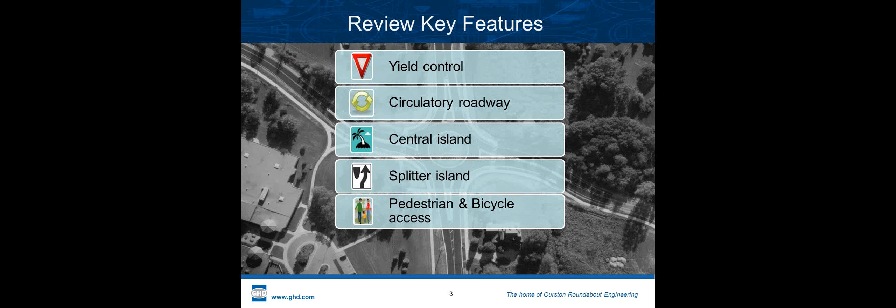And I wanted to start out, for those of you who perhaps don't have much roundabout experience but may have driven one, to kind of wonder what some of the features are. We'll just do a very quick review of these geometric design elements and some of the operating characteristics. So bear with me if you've seen this many times.

The principle of roundabouts is yield control. In some countries, I wouldn't take this for granted. We happen to have a driving culture where people adhere to regulatory traffic controls. But if you go to Beijing, it's pretty much first in - in other developing countries, they don't adhere to the same regulatory controls. So a device or type of control like roundabouts only has a future if there's cooperation among drivers. If there's a healthy amount of enforcement, education, and cooperation, then devices like this can really flourish and provide benefits to society. Examples are countries like England and the UK, where the cooperation among drivers is very strong, and the education and capability of drivers is very high. Roundabouts perform exceedingly well there - they have one of the lowest crash records of any developed country.

They lower their fatals, they lower their injury crashes, and they also have some of the most efficient infrastructure for the amount of pavement on the ground. And it's not by coincidence, but a deliberate thing that if you integrate driving education with good design, you'll achieve all the benefits of roundabouts. I'll say a bit more about that.

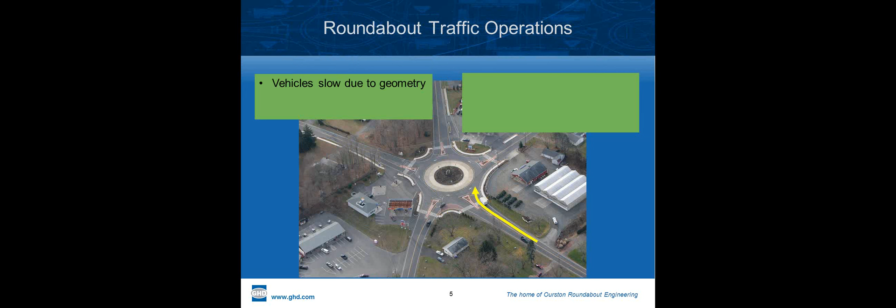Well, through deflected entry paths. The geometry helps to slow the vehicles so that when they arrive at the give-way point, as the British refer to it, or the yield line as we commonly call it, the speeds of entering and circulating traffic are relatively equal, within 5 to 10 miles per hour. That helps to motivate the entering driver to yield to circulating traffic.

Very important for roundabouts, and that in itself is a strong suggestion that geometry plays a very big role in how roundabouts operate—that yielding before entering. The counterclockwise flow, we all understand in the UK it's clockwise flow for left-hand drive, but over here we interchange roundabout layouts and just put the deflection on the other side from what the British apply.

So they tend to have less delay than traffic signals. At least the studies and early results from the last 10 years of feedback from roundabouts in operation show us that they're more efficient and reduce stops, delays, and improve air quality. So there's our counterclockwise flow.

This roundabout—I'll try and give you a commentary on these—is near Hartford, Connecticut. The DOT had involvement in it. It was a county road project, shoehorned into some very tight development and access constraints. I'm sure you've seen sites like this: a 5-leg intersection, very difficult to signalize. It met signal warrants, and they had to take some property, but access wasn't severely impacted.

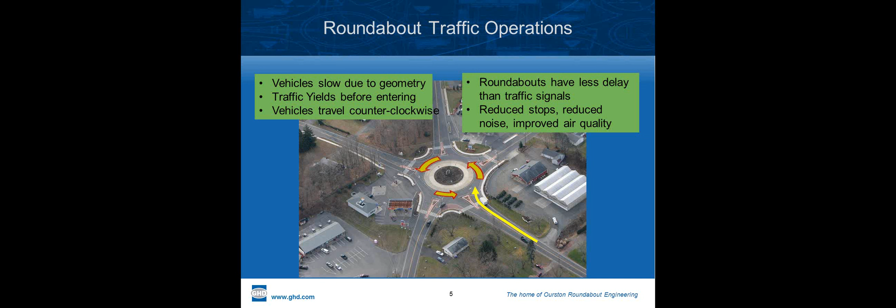So I love looking at roundabout photos. We have a lot of that in this module, and for the next 11 hours or so of these sessions, we're going to do a lot of visual.

So other roundabout features: the circulatory roadway, whether it's single lane or multi-lane, whether it's striped or unstriped, and we can talk a bit about the striping issues and crash frequencies associated with it.

The splitter islands that divide opposing streams of traffic, and assist with the deflection characteristics of the geometry.

The exit paths and the natural exit paths of roundabouts—I rather like flatter and not so curvilinear exits, and I think they're justified because if it's a capacity device, you want to flush the traffic out of the circle. You don't want to impede it as it exits. That, of course, depends on the quality of entry design and how slow you can get them to enter, whether or not the exit speeds are too high for pedestrians or just adequate. So there's a lot of kind of not too hot, not too cold, just right in terms of design of roundabouts.

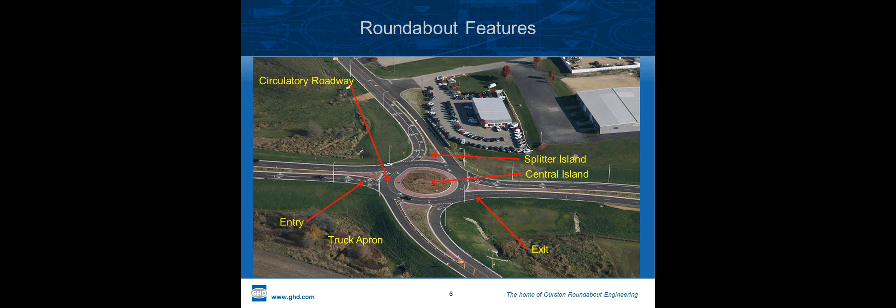Central Island—these days they're being mounded, although there's no safety research correlation between crash incidents and the height of the Central Island. It's intuitive for designers to want to block sight across the circle.

Then the truck apron, which is probably about a 12-year-old invention. When we began to stripe roundabouts, we had to add truck aprons because lane discipline demanded that we provide additional over-tracking area for the trucks. Otherwise we had sideswipe issues. So back around 2002, the first truck aprons began to appear on multi-lane roundabouts. That deflection characteristic is key to the operating condition.

From the straight line path, it's a visual deflection, it's a physical deflection, so the driver slows as they enter. But it doesn't demand or take so much efficiency away from the intersection operation that it's poor in comparison to other types of control.

Roundabouts are generally preferred at rural locations where signals can result in high-speed angle crashes, so it's a safety countermeasure. Anyone who does safety audits, roundabouts are now in your toolbox. Any location with a high crash history where you have signal warrants, or in some cases you don't have signal warrants, you may have a safety warrant, or you have some high side street delay that doesn't meet signal warrants, and a roundabout's the ideal solution.

Obviously at congested intersections, and we have enough proof where roundabouts are reducing congestion very well, where there's a high proportion of left turns, where you would otherwise put in a double left turn, or you have protected phasing demands at a traffic signal that can't be served because of other demands of timing at the intersection. Roundabouts are suitable in those conditions.

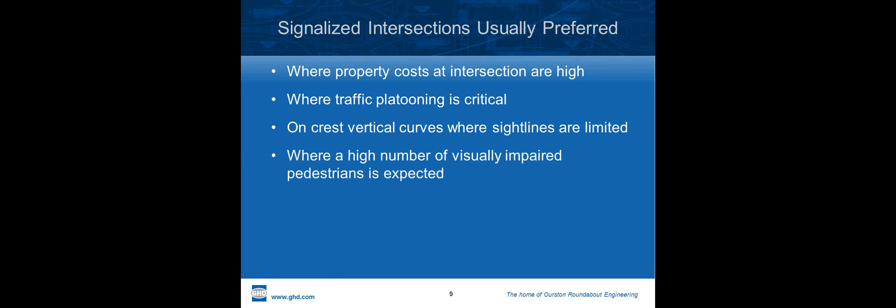Visually impaired pedestrians are expected. The U.S. Access Board deems a single-lane roundabout to be an accessible intersection with the proper crosswalk treatments. That's a debatable issue, and I'll show you an example near the end of our slide set where we went to a municipality and a roundabout was proposed, but we had some visually impaired and wheelchair constituents in that community that opposed the roundabout, and the signal was preserved or rebuilt and preserved. So some interesting comments can be made about the U.S. Access Board and those issues.

Where side street traffic is low and safety is not a problem and semi-actuated signals can be used, that's often a better solution than a roundabout. So there aren't many situations where putting a signal in place would improve safety as compared to a roundabout. But if it isn't a safety problem today, then sometimes actuated control is the better solution.

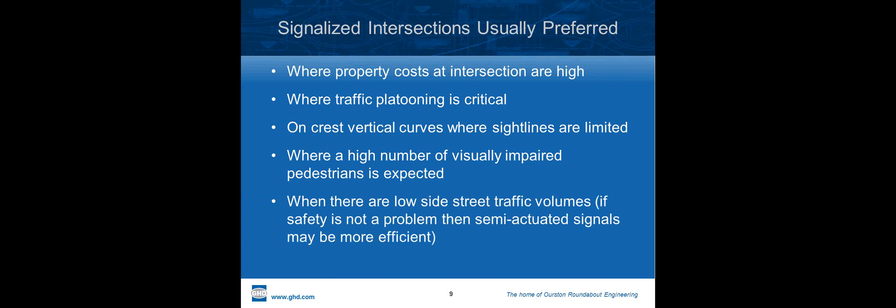We see this instance come up with development driveways, access, Walmart, actuated, semi-actuated control that only trips during peak hours or heavy shopping periods and is otherwise in a green for the main street. That's sometimes a more efficient way, particularly if it's in progression on a signalized corridor. That may be the best solution.

So some of the benefit considerations is safety. That's the one that sells it. If you're trying to convince the public that a roundabout is a good solution for a location, and they are coming back and saying, we don't like roundabouts, they're confusing, they're hard to drive, it's good to empathize with them and agree with them. But the real change occurs when people equate the change that they require as drivers with a safety benefit. When you can tell them that we understand this is not going to be easy to learn how to drive, but it could save your life.

People are willing to change if they equate it with a benefit to them. So it's important to continue to tout the benefits of roundabouts in safety.

Operationally, it's a peak hour, everyday situation—reduction of delay, air quality improvements, and so on. The benefits from roundabouts, both aesthetic and in fuel consumption, are becoming evident, but we're not so strong in the research on that side of things. We're pretty good on safety and operational benefit research as a design community, but environmental benefits could use more studies. Folks at the university, this is great stuff for graduate thesis and projects—just get into the environmental benefits of roundabouts.

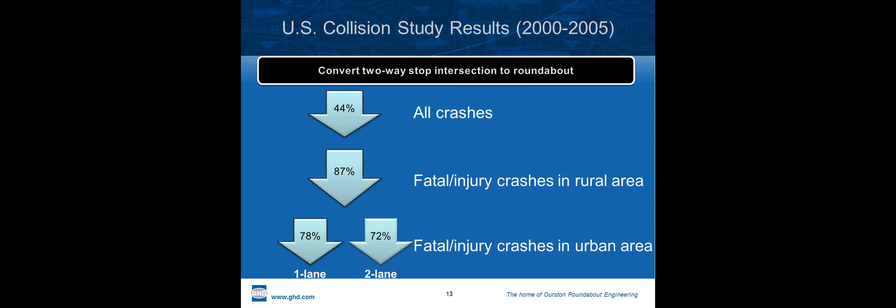So what do the statistics tell us? The conversion of two-way stops shows all crashes down in the 40s, close to 90% for fatal and injury crashes. For two-lane roundabouts, I'd say it's in the range of 50 to 70% for injury and fatal crash reduction. On the property damage side, some of the two-laners are actually generating an increase in crashes, and I welcome anyone to ask me about that.

I was part of the University of Wisconsin investigation on some of the crash reduction and operations of roundabouts.

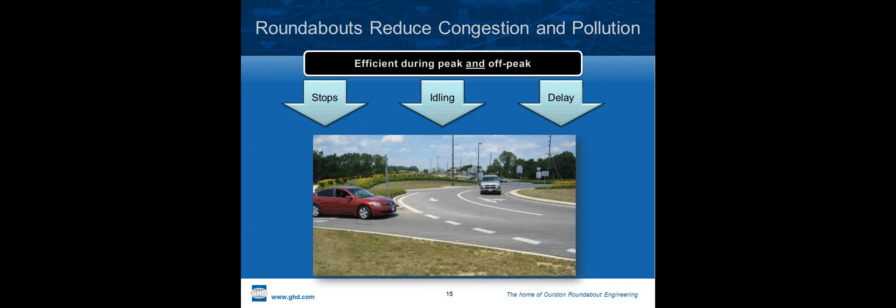We'll try and attend to that in the next couple of weeks of sessions. So the congestion relief—stops, delays, and idling—is self-evident. You can come up to a roundabout 24/7, and instead of an actuated signal, you get to go when there's a gap, and sometimes you don't even have to stop or yield at the entry. You just reduce speed and pass through comfortably.

So on to site selection. I want to show you a number of locations where I think roundabouts were an excellent solution, again to spark your imagination as to the kind of things that are possible and the decisions agencies have made to use roundabouts, either as a congestion countermeasure or to improve safety or reduce crashes.

This one over in Albuquerque at Central Avenue and 8th—you can see, if you follow my cursor, this sort of free flow, likely higher capacity, but a somewhat complex intersection condition with this left turn crossing at unusual angles in unusual places.

I don't know what the safety record is for this intersection, but I dare say it was probably efficient but not so safe. These days in urban areas, we really like to bring pedestrians into the picture with bicyclists. A design like this pushed the pendulum heavily in favor of pedestrian and bicycle movements with low speed.

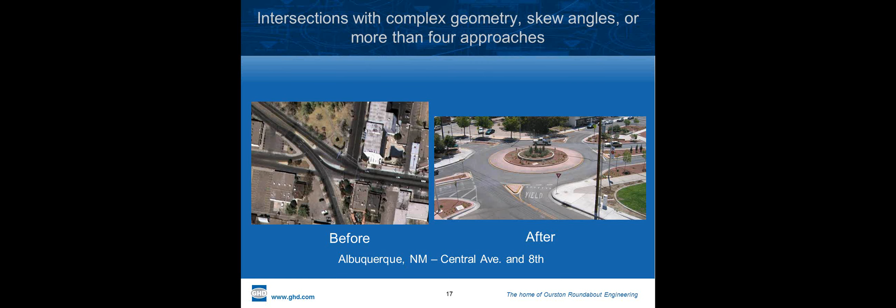It's obviously low volume capacity, and yet without signals, it's operating very efficiently in off-peak periods. So the shift is taking place, and communities are finding solutions like this very attractive to install roundabouts.

There's no longer signal heads in places like this, so the driver doesn't have anything more than the visual clues, and that puts a high demand on the design.

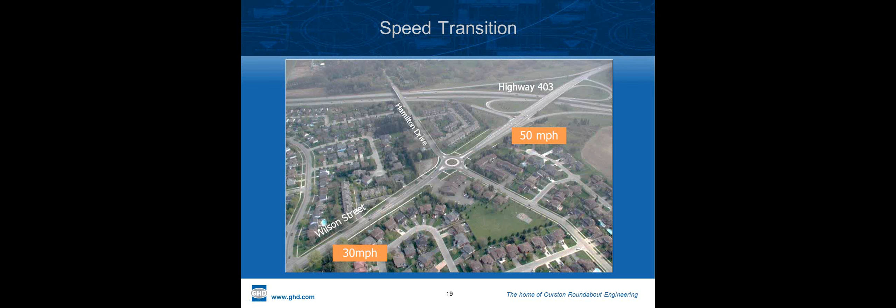There's a speed break from an interchange area down into a village area where posted speeds are reduced. This was an intersection that was otherwise warranted for signals, and within weeks of starting construction of the signals, they abandoned that option and went with the roundabout, around 2002, and it carries upwards of about 18,000 vehicles per day. So it's a high-capacity single-lane roundabout that's providing excellent speed control.

Down in Clearwater, Florida, there's a beachfront community with a lot of commercial and hotel uses, and this is a separation of land use between a more residential area and the built-up commercial areas. The residents are very pleased with the fact that it kind of creates an impediment for traffic to speed through and into their neighborhood.

I really like these because they show the creativity that designers are bringing in transit. A transit pull-out or lay-by is on the outside of the roundabout, and the use of contrasting pavements with overrunnable areas leaves the travel way intact and provides a nice pull-out for the bus, in some institutional cases or on a university campus property. So keep those in mind.

One of the most celebrated corridors for roundabouts was the conversion of Avon Road, where I-70 passes through, with a pair of teardrop roundabouts at the top, and then coming down to Route 6, two roundabouts in the center of town that replaced closely spaced signalized intersections.

Since these were done in 1997, there's been maybe $500 million of redevelopment and new development in these areas down to the creek area. Beaver Creek is just behind here. Former President Gerald Ford had a winter or summer residence up in that area. So these are very attractive tourist communities.

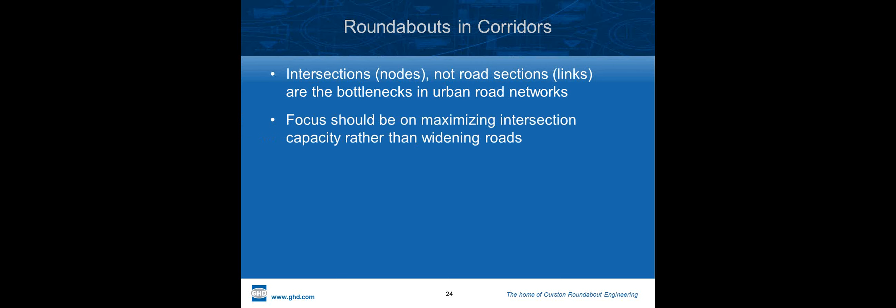Other roundabout corridors done since then recognize that it's the intersections, the nodes, not the links, where the bottlenecks occur. We all know as traffic analysts that we're not trying to solve link congestion as much as intersection congestion. So the focus should be on the intersection rather than widening roads. Leif Ourston termed the phrase 'wide nodes, narrow roads.'

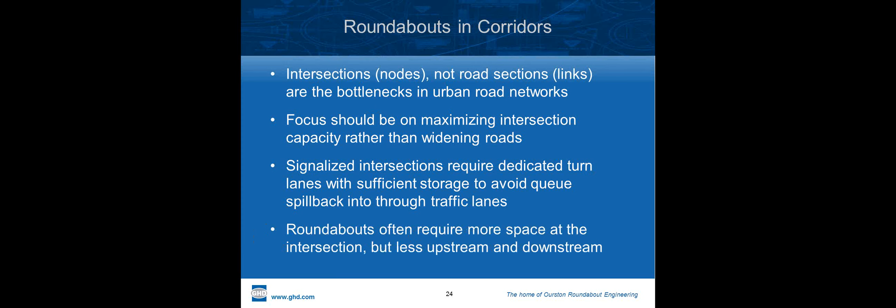The cost savings achievable with that wide nodes, narrow roads concept really make it possible for communities to advance roadway improvements without the added mid-block widening costs. So there's more space; the footprint at the intersection is always slightly higher.

Another good example of an arterial corridor was in Golden, Colorado, where four traffic signals were replaced with roundabouts as sort of the bookends of the development area, with a 2x2 configuration, two lanes in and out on these, and then single lane by two lane configurations in the mid-block, organizing and collecting up access.

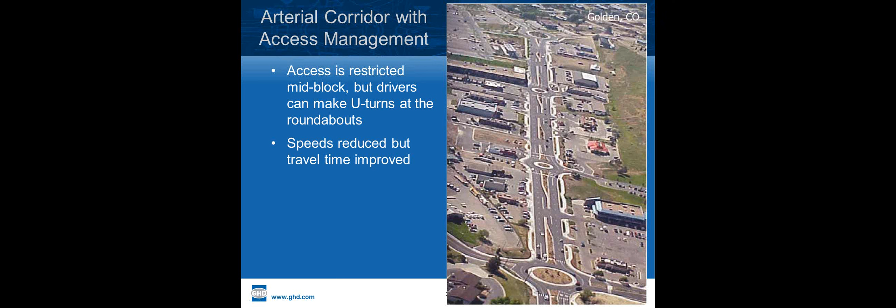The results were instant reduction in crashes, improvement in efficiencies, and increase in tax base. So papers have been published on this corridor on the commercial benefits of roundabouts.

Unusual geometry, 6 legs: St. George, Utah, milepost 4. If you drive west of Las Vegas into Utah, just 4 or 5 miles in you encounter this interchange. It has 6 legs, built around a giant Walmart. A bypass lane was added about 2 years ago for Walmart patrons, handling about 500 right turns an hour in the peak period. This little teardrop was opened up to full movements and enlarged because there's a Flying J truck stop here. These were built around 2002, then rehabilitated and upgraded for capacity in 2009.

Interior to some major developments, like Sparks, Nevada, you have this 5-leg roundabout with anchors of large retail commercial. There's actually going to be a casino and a theater added onto this development. We were asked to review this roundabout and see if additional improvements were needed. It has the capacity for 3-lane entries in its footprint, and we recommended they not expand it until traffic impact indicates it's necessary. Rather than take the development permit and expand the roundabout, because of concern for pedestrian safety, we wanted to find the balance between mobility and vulnerable road users. Very important not to overkill the capacity at the cost of pedestrian and bicycle safety. I was brought in to mediate the discussion between the developer and the city, and my recommendation was don't expand this until you have the traffic impact that suggests you need it. They put monies aside in case it's necessary.

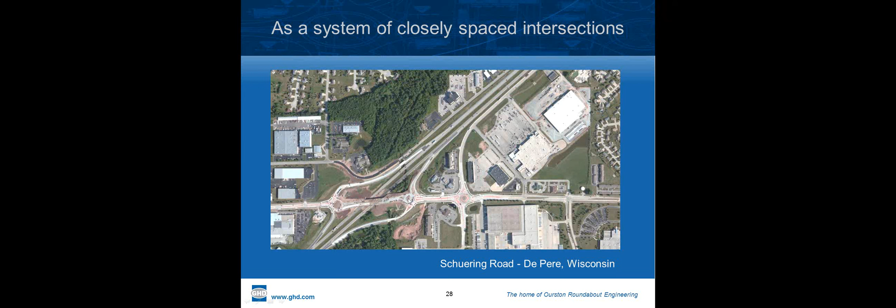Corridors of roundabouts, very tight, skewed interchange. You have to square up the legs, but you have to analyze these as a series. There's a 2-step analysis method I'll describe in a later session on software for analyzing roundabout capacities. This one happens to be in northeast Wisconsin, where there's an interchange package of 14 interchanges comprised of 44 roundabouts constructed over a 5-year period—probably the world's largest collection of roundabouts built at one time. All of them have 2- and 3-lane entries. Some require oversized, overweight vehicles to pass through, and in this case they pass through the middle of the roundabout. I don't have the finished photo yet, but it was opened a couple of years ago. We'll talk about oversized, overweight vehicles in design in a future session.

Another poster child of interchanges at roundabouts was Vail, Colorado. Notice there's a bridge with a river crossing underneath the edge of this roundabout. The undercrossing of I-70 was not widened, and the roundabouts were retrofitted with access without severe access loss—a real win-win solution. Vail did 2 interchanges, and at the time these were built, the queues on I-70 at the off-ramps, which were just stop-control diamonds, were in the range of a mile back from the ramp terminal. So high-speed traffic on I-70 was passing the outside lane, dead stopped for a mile approaching the interchange—imagine how safe that would be under snow-covered roads. This really put a stake in the ground that said roundabouts are great for interchanges, and development wins in the end.

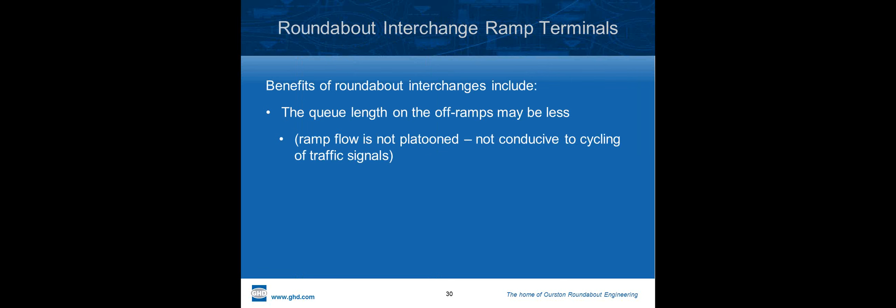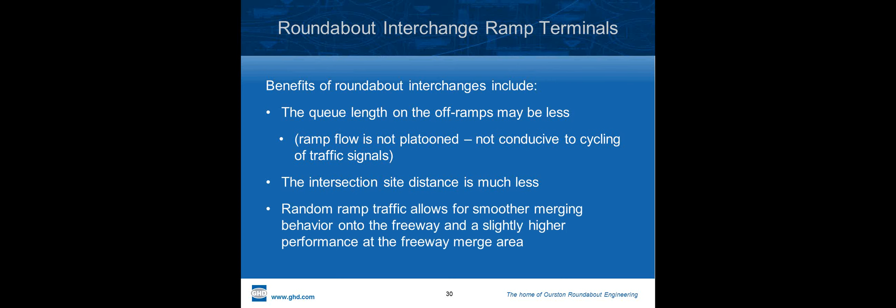So, ramp terminals—the benefits at interchanges, some things we didn't quite count on: we knew there'd be shorter queues without signals, but because ramp flow is not platooned and not conducive to cycling, the random ramp traffic allows for smoother merging behavior onto the freeway. In interchanges where we would have expected ramp metering, the roundabout discharge pattern is random and doesn't collect and platoon traffic down the ramp, so we don't need ramp metering. It's certainly not needed as early as we might in some cases if we'd added signals—that was an added bonus we hadn't quite counted on.

Cases like this may be a little different, because this is a complex series of roundabouts with 2- and 3-lane entries and bypass lanes. It's in Brighton, Michigan, near the Detroit area. The cost savings of not widening this bridge, for the sake of roughly 1 million square feet of commercial development, and the permit extracted from the developer, paid for this improvement and the roundabout on this side of the interchange. Big savings in bridge costs translated into improvements in the ramp terminals, so you wouldn't have back-to-back left turns and could integrate these 2 intersections.

But having said that, this is complex. The signing is complex, the wayfinding is complex, and this was an ambitious undertaking. It wasn't that well received initially. Michigan did not have a strong signing skill level for roundabouts.

They tried to adapt what they knew, and it was met with some resistance. Someone even went out of their way to conceive a board game, where the idea was to roll the dice and try not to get lost in the roundabouts. That was actually covered in the Chicago Tribune, with an article published about it. So it did receive quite a bit of ridicule. But when you're solving big congestion problems, ambitious things like this should be on the table.

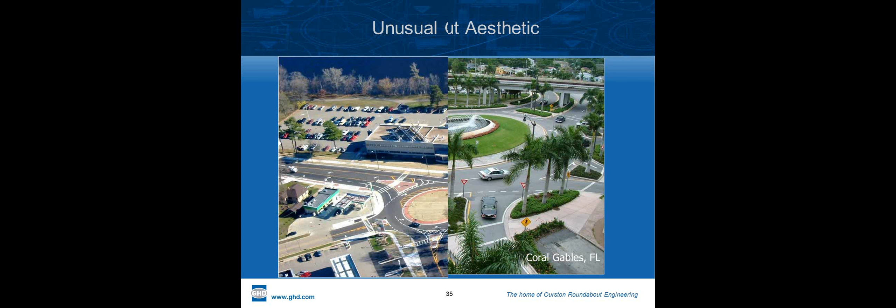Unusual geometry, this happens to be the district office for one of the Wisconsin DOT offices, and the staff in the design section would sit and watch this roundabout. Before it was built, it was a signal-controlled intersection with long queues, and school buses especially, around the 3 o'clock let-out times, had a lot of congestion, and that's all vaporized since it opened. The safety record has been pretty good.

Complex but aesthetic, we try to go for aesthetics if we can. It's the added bonus. Down in Coral Gables, Florida, they achieved a very good retrofit, with a lot more green than pavement, and certainly more than what was there before. So even tight with bridges and overpasses, some great examples.

When we hit about 50 schools, I was monitoring this database of school locations where roundabouts had been placed, with contact names and information from the school superintendents, the board, the parents, the police, and the local agencies, and everything was coming out positive.

So after about 50 sites were recorded and noted, we kind of gave up on the inventory, and at last count someone said there were about 100 roundabouts at schools, middle schools, high schools, all showing great promise for congestion relief, and improving intersections to the extent that where this might not have been accessible for pedestrians previously because of high traffic speed, the slow speed has allowed pedestrians to come into these areas. So the parent drop-off demand has been reduced at some of these school locations.

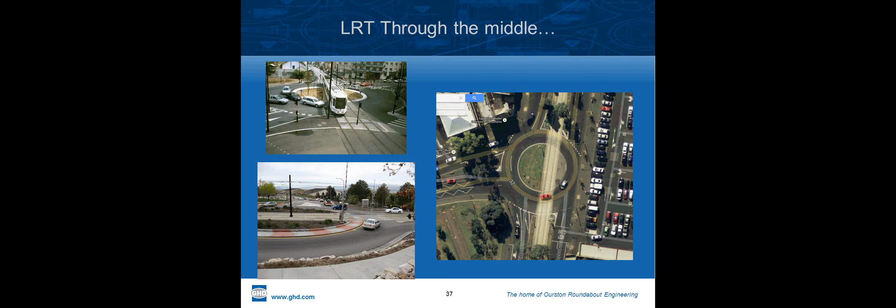So Bill Baranowski, who's fairly well known in our roundabout circles, pun intended, has been kind of a champion of roundabouts with LRT and signals. So down in Arizona where they have the LRT, they're proposing a roundabout over in Mesa, just southeast of the city. Some of you might recognize this.

Right-of-way constraints. I wanted to mention mini roundabouts because we're seeing more examples of mini roundabouts popping up. Federal Highways is doing a study where they'll publish the results of some pilot studies of roundabout installations. This is one of them where in a rather challenging context of higher speed approaches, roundabouts have been implemented.

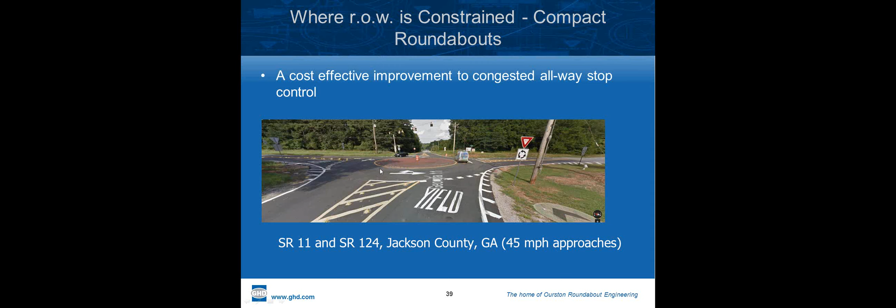This one, a pretty severe retrofit, was very low cost, $70,000 to install, mostly paint, a central island laid down, some buttons. Again, in non-frost climates like Georgia, you can afford to get away with some of these things. But they're going to formalize the curbs because what they did was reduce severe congestion at an all-way stop. They did it so effectively with reasonable safety performance that it's proven to us that even in moderate speed conditions, a mini roundabout or a traversable central island roundabout - a midi, if you want to call it - is a very effective, cost-effective solution. So we're starting to see more of that.

Here's a county near Detroit, again real cost constrained, all these all-way stop intersections, some of them warranted for signals, lots of them with long delays and long queues. We're working on mini roundabouts for a couple of intersections. To have a $1 million intersection improvement cost every time you turn around, whether it's signals or roundabouts, it just makes it impossible to keep up with the demand as development moves away from some of these urban areas. So they have to find creative ways.

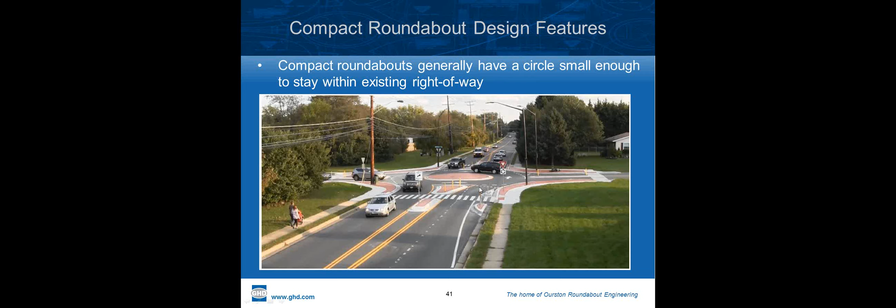So the mini roundabout at this site over in Maryland is a very compact retrofit to existing conditions, with even utilities being upheld. The curb bump-outs improve speed control as a retrofit, again not interrupting drainage through the edge here, but just creating a bit of a chicane or speed control through some of the physical curb locations. The central island is fully traversable, so there's not a lot of benefit from deflection, but the narrowing of the approach helps.

So on to intersection control evaluation, which is sort of the heart of this session. But maybe before I do, Nathan, let me stop and break for a minute and catch my breath and see if there are any questions. And if you want to moderate that, let's maybe have a quick discussion about what we've seen so far.

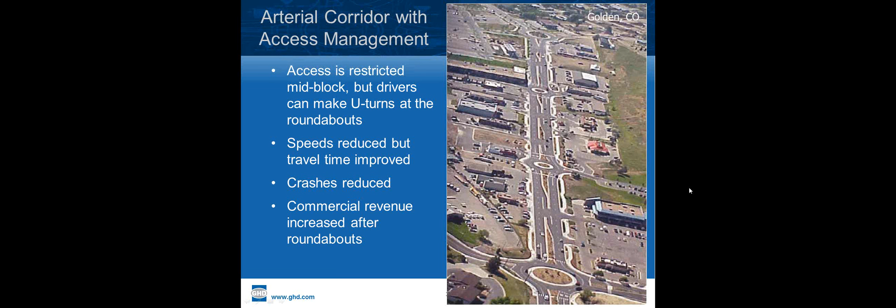If someone wants to write in a chat question or a comment, Nathan? Yeah, I'm looking, I don't see anything yet. Seems like everyone's content. All right, well, I hope my quiet voice isn't putting you to sleep.

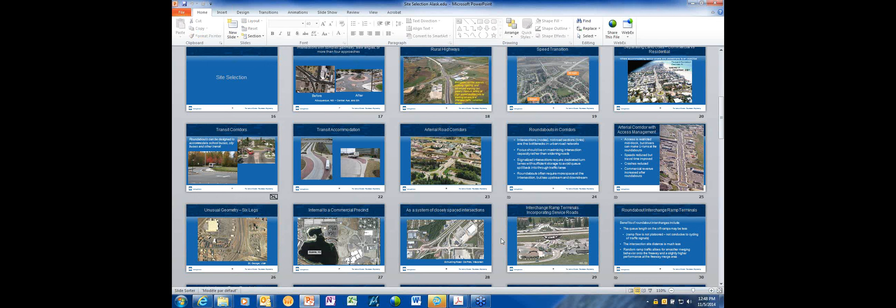So we'll keep things moving. I sense we're going to have a bit of time to be flexible enough near the end that we'll be able to recycle and go back and look at some of these options. If someone has questions about a specific project, we can go back and look at some of these. Whether we design them or not, we try to maintain a history of a lot of these projects we may have had involvement in or are aware of, whether they're unique or there's something about them we'd like to record and keep information on. I find it quite useful to monitor these because we need to recycle this knowledge.

So let's move into something a little heavier and a little less eye candy, and that's the intersection evaluation. We call them ICE reports, or intersection control evaluation. Let me just make sure I'm in the right place here.

So what are agencies doing and what's emerging as best practice? This information I'm sharing with you—I do want to hear feedback from local agencies in the various sessions we're holding here, because I want to hear what you're doing. That's one of the reasons I wanted to do this with the university, just to find out who's doing what, what ground you're breaking, and how it's working out for you.

So I'm going to share with you what I believe to be emerging practice. It's probably state-of-the-art. If Federal Highways is involved, it's likely some of the newer material, and they work in the background. In this case, I'm going to point to Caltrans as one of the emerging, sort of a latecomer, but one of the leading states in terms of the quality of these studies and how they're conducted.

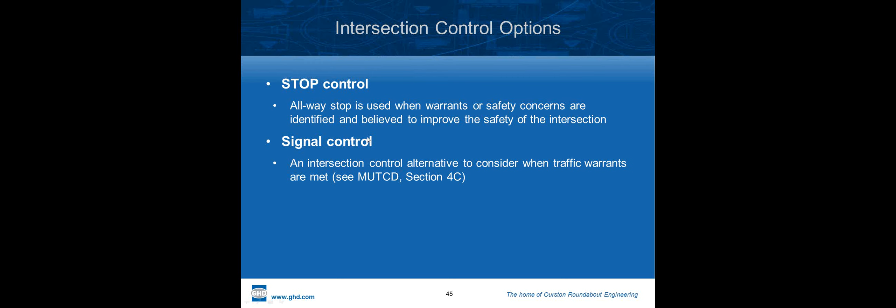It's a very low cost solution, but it may not provide the longevity and capacity improvement you need to couple with the safety improvement. Of course, the one we know with signal warrants, we're all too familiar with signal control, and I haven't added the other ones, but the roundabout.

We're going to keep this discussion fairly simple. I'm not going to go into DDIs and interchanges today, single-point urban, or even J-turns to displace lefts. We're just going to focus on these three as options for intersection control—probably talking trunk highways, at-grade intersections, county, city, state.

In the step one process of practical scoping and screening of alternatives, you need a concept-level understanding of the intersection control strategies—concept level being very cursory in terms of footprint, CAD effort, and analysis. You're examining that solution to see whether it meets the transportation purpose and need consistent with system performance criteria, whether it's safety and level of service or a combination, and of course cost as a reality, meeting the financial constraints of the project.

A simple example: you want to put a roundabout in an intersection, but it takes a historic building on the corner to place the roundabout. So the roundabout may be feasible in terms of system performance, but financially and environmentally, it's an impractical solution. So it does not get carried forward to any further screening or evaluation.

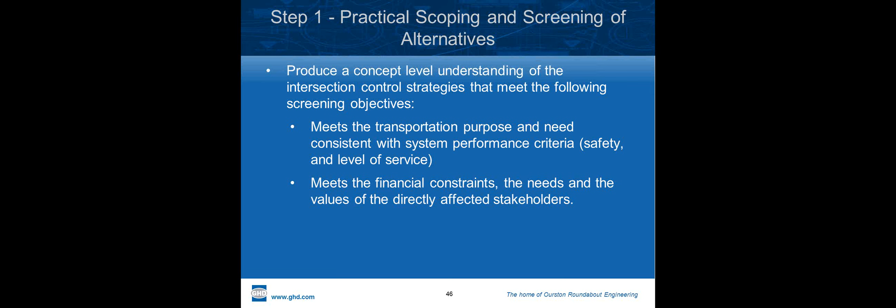That helps the public process, and it helps the agency—it's a deliberate approach to solving the problem, not carrying so many solutions forward that may be impractical.

The evaluation should be done as a team effort. I think of this pre-screening step one as kind of a panel approach, where you have folks from different skill sets—planning, operations, design, and possibly community—coming together to do that high-level review.

I've done safety audits in a charrette-type VE study where you start on a Monday and have the report done on a Friday, doing all the field work and consultation in between. Throughout the week, you have people coming and going with different input on the project.

So the project sponsor and someone with a traffic background, folks that understand the cost and safety benefits of the improvements, and of course spiced with good engineering judgment, and sometimes a committee.

I've used this term Innovative Intersections Committee deliberately, because we in the roundabout community that do this full time have encountered a challenge where agencies have developed a roundabout team or focus to the extent that they've developed a committee on roundabouts. I honestly have to tell you, it's like painting a target on something you want people to criticize.

Because of the emergence of innovative intersections, my advice to agencies is, if you're going to do a committee approach, lump roundabouts in with everything else that's innovative. Don't separate it out, don't make it so unique—it's in the toolbox for traffic safety and congestion relief, and let's count it among the alternatives.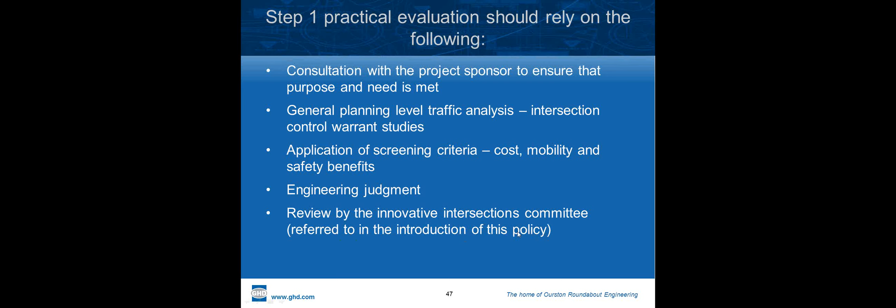And what this gives you is the ability to create standards and policy that are uniform. It's not just a standard or policy that relates to roundabouts that isn't integrated with other types of control. So as you move these things forward to project level and programming, you're doing things in a coordinated fashion with all types of innovative intersections. There's a preamble in the introduction of the policy where I talk about that.

Maybe while I'm at it, I'll pull this document up. Can you see this, Nathan? Yeah, we can see that.

Okay, so this just happened to be this particular client. Back earlier in the year, they asked me if I would help them develop some screening criteria and a basis for conducting feasibility studies. Fort Worth, Texas has a very ambitious program, they've already built a dozen roundabouts in less than two years, from planning to construction in six months for a series of four roundabouts, really intensely going after some of the benefits of roundabouts and corridors.

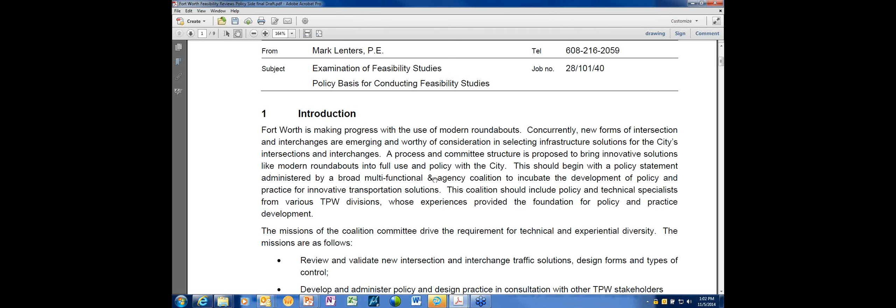They came back and said, well, we really need something to help us screen and identify sites, and screen out sites that we shouldn't be putting roundabouts in, because with that much enthusiasm, there's a chance they're going to put one where it doesn't belong. And that's like putting an unwarranted signal - it's going to develop resentment.

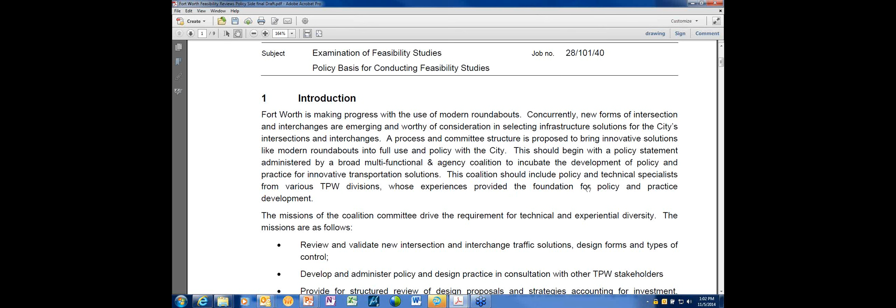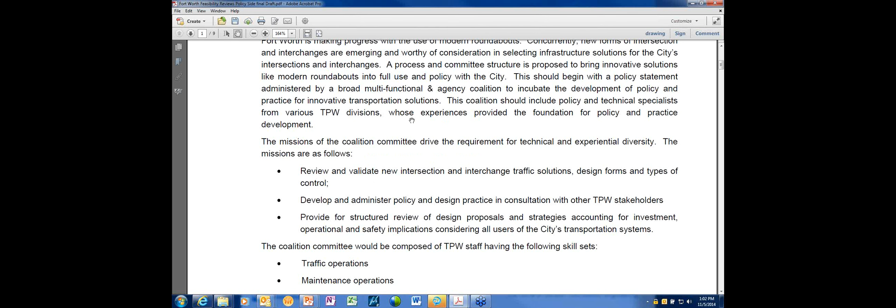So we talk about a coalition of technical specialists from the Transportation Public Works Division, whose experience provides the foundation for policy and practice development. Anything new like this requires a concentration of effort. Roundabouts don't just pop into your toolbox - they have to be brought in a coordinated fashion, from people who have experience with new traffic control devices and all that comes with it.

So there's a mission for the committee and the coalition and who should staff it. One of the first tasks is to develop policies to support the use and implementation of roundabouts.

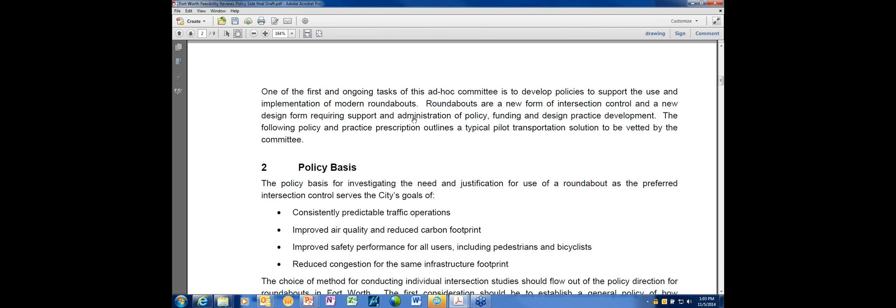In a subsequent session from today, we're going to talk about implementation. And again, I would like to hear from agencies who have had some experience, both good and bad, as to how they've implemented roundabouts - everything from administration of policy down to funding and practice development, staff level, politicians - what kind of experiences are you having?

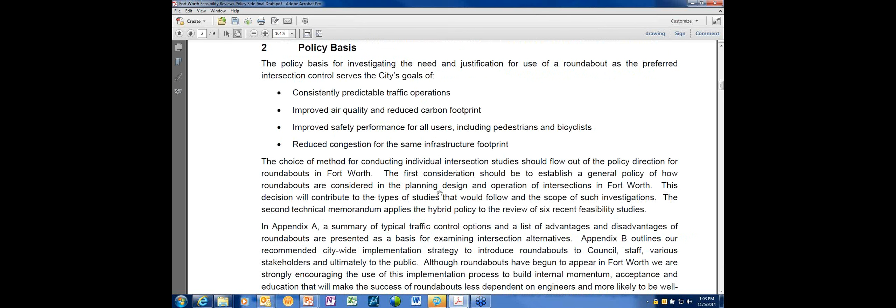And this is the key for the public: consistent, predictable operations, improved safety performance, reduced congestion. And whatever solution will give us that is what we should be building.

So through the policy, we go through some of the considerations of when you should use roundabouts, signal warrants - these are very important policy level considerations that you decide what's going to constitute the need. So when you have a signal warranted, you're going to look at a roundabout. If a collision problem exists and you have your top 5% at the state level, a roundabout is in the toolbox. I'm pretty sure that's the case for Alaska, as it is for many states now.

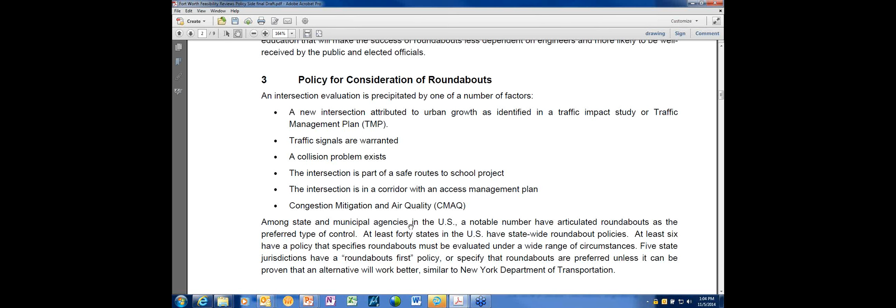Safe schools, corridors, access management plans, and congestion mitigation, air quality improvements - this in italics is a statement that comes from a number of agencies, and I've kind of blended it. Again, we'll talk a bit more about that in implementation, but it's essentially a policy that states when the city has a problem with an intersection that involves safety, operations, and cost, it's going to consider a roundabout as an option. It doesn't commit to their use, but requires a test of the practical feasibility of the roundabout.

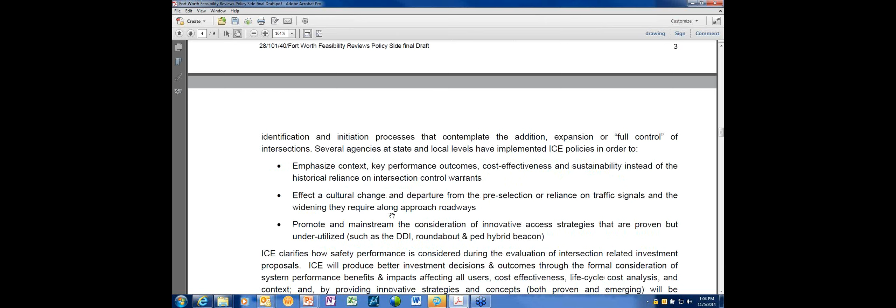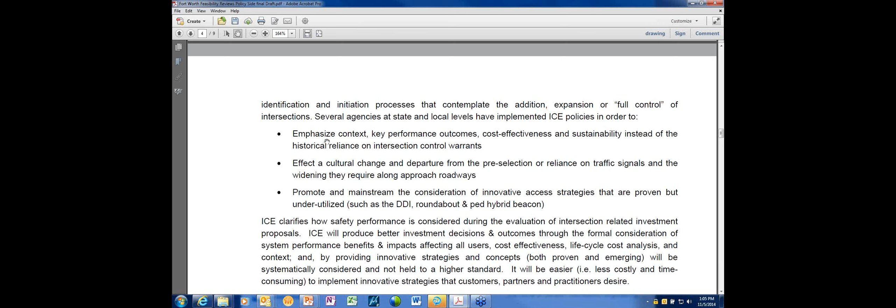So moving down into the intersection control studies element - we've sort of covered the preamble of why you need a policy, what is the foundation for setting up intersection control studies in terms of a committee, in terms of standards and policies. And then this is the ICE report, or intersection control study guidelines. I plagiarized some of this from the Caltrans document, again emphasizing context.

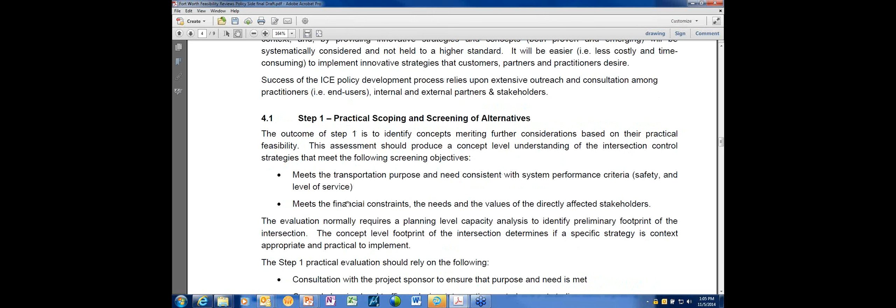I mentioned this, the pre-selection of signals and promoting creative solutions. And it clarifies how safety performance is considered during the evaluation, cost effectiveness, innovation, and different strategies are brought into the mix through the initial phases, step 1 and step 2, describing the process itself, how it needs to meet the transportation purpose and need for step 1, or the pre-screening, if you will, the financial constraints of the project.

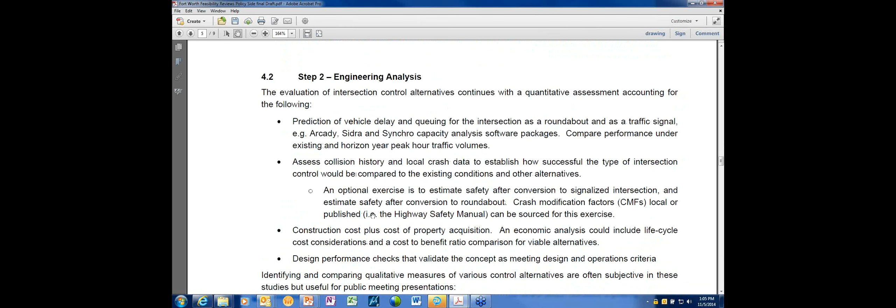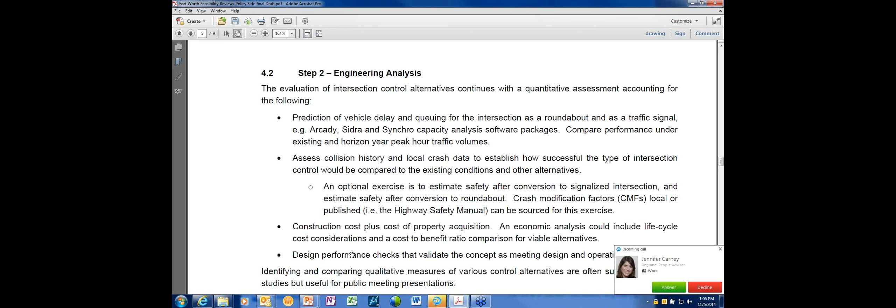The practical evaluation, I've had this in some of the slides, as you noted earlier. Then the step 2 evaluation - I'll move back to the slides in a minute here, but you're just covering some of these things there, where we do analysis of operations, safety predictions, cost - and I should put my phone on Do Not Disturb here.

Estimation of costs and safety benefits, and some of the qualitative things like environmental factors, pedestrians, bicyclists, speed control, and so on.

I'll go back to the slides and show you that. Okay, so back here.

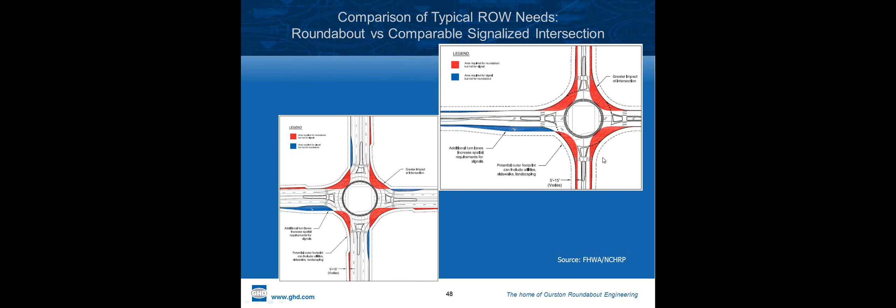So the comparison of typical right-of-way needs. This is again a practical consideration. If the roundabout takes an excessive footprint from the corners and there are buildings and property that make it prohibitively expensive, then you may want to remove the roundabout as an option.

So the visualization might be a step 2 or stage 2 element, or even at the design stage, before you go to the public you produce something like that.

So I want to break the step 2 comparison of options into two categories, quantitative and qualitative. Quantitative being the things that we can numerically articulate, things like the prediction of vehicle delay and queuing under horizon year and existing year, things like the collision history.

That we can document to identify the problem and how successful any type of control would be to eliminate a crash problem.

The economic analysis components are part of the quantifying of costs. Not all agencies want to use an economic analysis. There are some pitfalls in doing it, and I'd like to mention and discuss those.

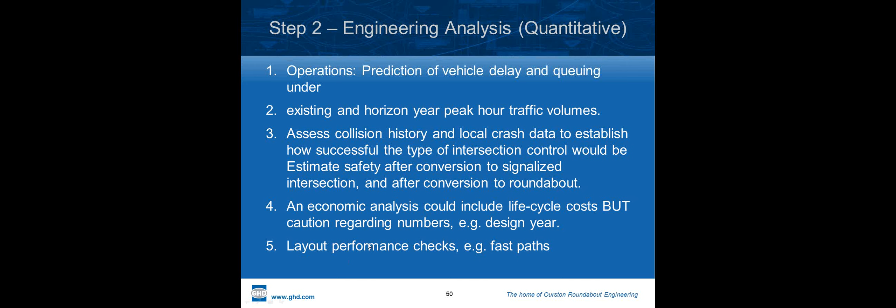As part of the quantification process in this step 2 detailed comparison of options, we'll take the design layout and perform some checks on it. In some cases roundabouts are the only solution, and there may be 4 different roundabout options possible in that comparison, so one roundabout may perform better than another. I hope to show you an example of that if we have time.

So comparing operational performance, we'll talk a little bit about some of the models later on in these sessions. We want to quantify delay and queuing, using Synchro, in some cases VISSIM, for a system level review for signals, and predictions of delay and queuing for the roundabout - these are the popular software packages.

I used to be a big advocate of Rodel, but Arcady was sort of the parent of Rodel, and it's been upheld and maintained very well, so we like Arcady.

Just an aside, near the end of our sessions, I think in 2 weeks, we have a session where we're going to do some of the software. If you're still with us, I'm going to send out a link where you can download a demonstration copy of the software, a full version, that you will have access to for up to 3 weeks. We usually do that so you can play with the software before, during, and after our session, and get good exposure to its usefulness. I'll give examples of the kind of things we've been doing with the software for roundabout capacity prediction.

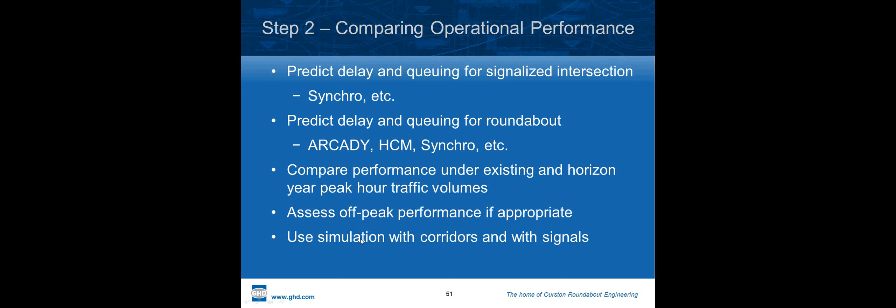So we'll compare the two options, signals and roundabouts and stop control, under peak conditions and sometimes off-peak conditions if appropriate. And if we have a system of roundabouts or a system of signals or combinations of roundabouts and signals, we'll use simulation. That's quite attractive for the public meeting process too - you bring that to bear on the public process.

Now, this is an important area too, comparing safety performance. In North America, we've got some well-developed safety prediction models. They're still not as well developed as the UK, who happen to have more roundabouts and have been researching them in greater depth than we have, so they have more history on their crash prediction models. They're able to get down to not just intersection-specific comparisons, but arm or leg of the intersection-specific comparisons - safety performance functions for a particular approach to an intersection - whereas we're still dealing with intersection-level estimation of safety performance.

I'll talk a bit about those models in a minute, but what we're trying to do is compare safety performance of alternative controls. So we need to estimate what's the existing condition, and we're comparing the safety performance prediction to the existing condition for the 2 or 3 types of control.

In the after conversion, we've got some good studies that show roundabouts are reducing crashes, as they started out saying, somewhere in the 50 to 70, 80% range. So we have crash modification factors coming from either the Highway Safety Manual or the Federal Highways Clearinghouse. They're published through the websites, and you can also get them in NCHRP Report 572, Roundabouts in the United States.

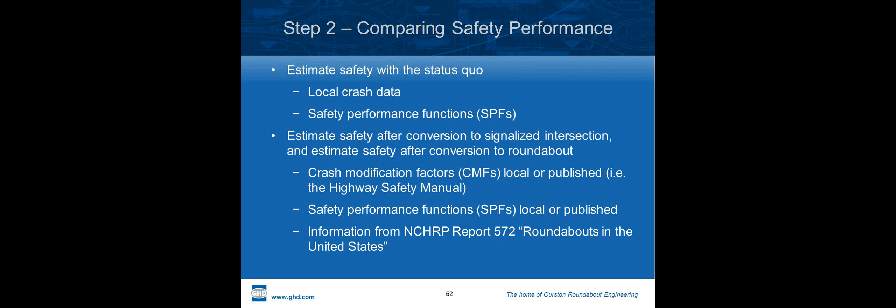That was the watershed study that led to the Roundabout Guide published in 2010, entitled Report 672, which is an informational report on roundabouts. The 672 report replaced the year 2000 report from Federal Highways, which started the roundabout revolution U.S.-wide for standards and guidelines for roundabouts - a lot of agencies have adopted that. So report 672's foundation was report 572, the research on roundabouts in the United States. They did speed studies, capacity studies, pedestrian-related studies in terms of safety. They looked at costs, and they developed the guidelines that we use now out of that 572 report.

So getting on with the comparison, we're talking about delay comparison, safety comparison, and then cost comparison. Those 3 quantitative criteria, I refer to as the sniff test. If you're going to a council or a commission to promote the use of a roundabout over some other type of control, you lose your audience on details that are not as significant as safety, capacity, and cost. If you bring in lots of little quantitative and qualitative detail, they tend to be suspicious, because our models and research isn't so robust and rigorous in the minor details.

We tend to stick to the high-level stuff, so when a politician reads your study, they do the sniff test and think, yeah, that makes sense in terms of cost, safety benefits, and congestion relief. I'll buy that solution. The public is the same way—they're much more discerning than they used to be, better educated, and read these reports. So we try to stick to the higher level quantitative measures like safety, capacity, and cost.

In the economic evaluation, right-of-way is a big factor, and construction cost is obviously a big factor. The addition of turn lanes with signals can add to the signal cost, whereas the roundabout has a wide node footprint with narrow roads on approaches.

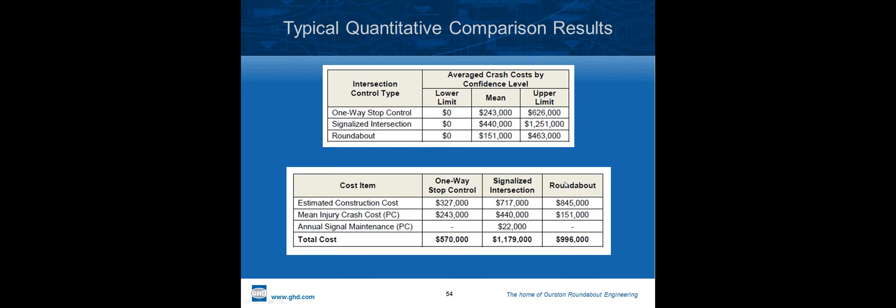So comparing one-way stop control, signal, and roundabout—not a huge difference in costs and benefits in terms of construction costs, slightly higher for roundabout, but better on injuries and maintenance. You could tip these values depending on whether you use upper or lower limits and come out with roughly the same costs between the two types of control. And that creates a bit of a dilemma—then how do you decide? It's sometimes the policy direction on the use of roundabouts that becomes the determining factor.

Moving from a quantitative analysis to a qualitative analysis, the second step of that screening is a detailed comparison of options using qualitative measures, some of which you could quantify, but we dare not, to avoid criticism, because the environmental benefits, vehicle noise, fuel consumption, and emissions are not so well researched that we have absolutely reliable values to report for comparing different options between signals and roundabouts. So we tend to deal with these qualitatively.

In many cases, the roundabout, in the studies we do have, shows not just how much better, but the fact that it is better. It's got reduced emissions, it has reduced fuel consumption.

So we tend to say qualitatively that the roundabout is likely a better solution in those cases. We have crash statistics on peds and bicycles, but we also have ADA impacts, so those need to be considered on a context basis when you're doing the comparison. Aesthetics, it's hard to argue against a roundabout when you have that much green space in the center of the intersection.

Construction staging - this is a very important one at the feasibility study stage. I want to stop and highlight this for a second because it's often overlooked. We're doing operational comparison, we're doing safety comparison, but no one does enough detail on the constructability of a roundabout in many cases to realize the impacts during construction that need to be accounted for in the comparison of options. If you can't stage construction to preserve and keep open approach roadways, and the impact of closing them is too severe, then perhaps the roundabout should not be considered. This has sometimes been overlooked, and they've been trapped into having to build a roundabout under very difficult traffic conditions.

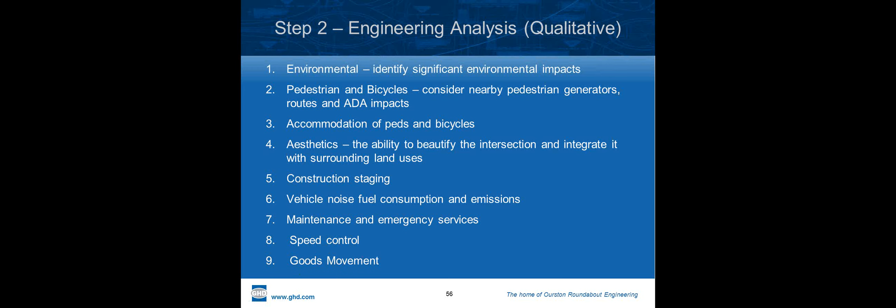So I want to highlight that as an important criteria when making a comparison of alternative controls. Then the benefits - some of the speed control can be quantified. Signals have a green, traffic passes through at high speeds. Roundabouts control the speed according to geometry, and generally it's in the range of 20 to 30 miles per hour. Goods movement - mixed reviews on goods movement, so I wouldn't say that it's always a benefit to have a roundabout in terms of goods movement. It somewhat depends on the type of vehicles, whether they're oversized, and the frequency and percent of trucks at an intersection. Those, again, are context specific.

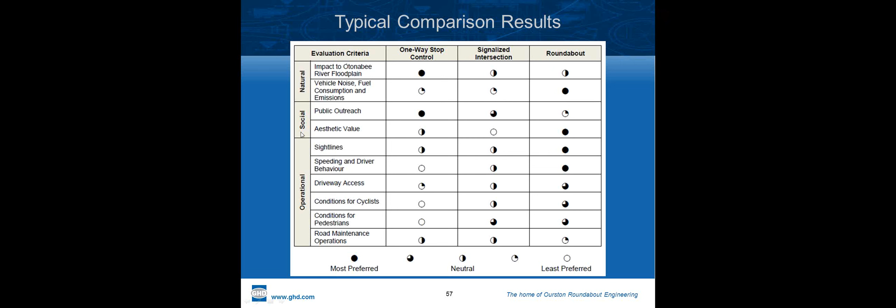There are creative ways that you can do your reports and make typical comparisons - results with pie charts numerically. There just needs to be some way to quantify this comparison, and some way that is comprehensible in terms of the public eye and other technical professionals. They can look at your report and reason out what you've done in terms of the benefits.

We've got both qualitative and quantitative measures built into this overall evaluation, so it does have a bit of a blurring effect where some aspects we can quantify and others we cannot, and yet we're still applying pie chart diagrams to all of these values. So we have to be reasonable, fair, and balanced in our approach, and not put so much reliance on the results that come out of these pie charts. And yet we still need a decision-making process. So it does become a challenge when you're blending both quantitative and qualitative results.

This is a rather transparent, traceable decision-making process, but when you're splitting hairs over the size of the pie or the chart, it's sometimes difficult to apply good science to this decision-making process, and engineering judgment, heuristics, and experience are really necessary.

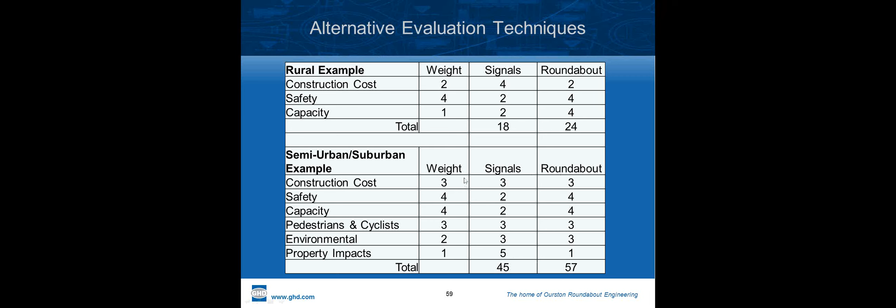Well, depending on who you ask, this one might be the most important, and then pedestrians show up at your public meeting and tell you that. So a good evaluation, you should be able to do a sensitivity analysis, vary the weights, and run the analysis again and come out with generally the same answers every time. Then you're in the sweet spot in terms of decision making for the option that seems to be emerging from the process.

So, some sample intersection studies. We'll kind of wrap up with these, and then we've got to open it up for questions, because after about an hour and a half here, we've been going for that long. I want to have a break and let you have some input.

So I'm going to show you these two studies, and these were done at the life cycle cost level, with cost-benefit type analysis, not incremental cost-benefit, just a straight-up comparison of options. One was a signal, the other was stop control, where signals were warranted. I'll walk you through some of the highlights of the studies, what led to the need, and some of my comments and the issues and pitfalls we ran into.

So Urbana is the home of University of Illinois, a grid street pattern. You could argue they should be putting signals on these majors because they can get good coordination at half-mile spacing, quarter-mile spacing. But the city's proactive about replacing or introducing roundabouts in some of these corridors instead of signals. As they expand out to the east to Highway 130, they're talking about extending these roadways and having roundabout-only corridors as they move out into some of these rural areas.

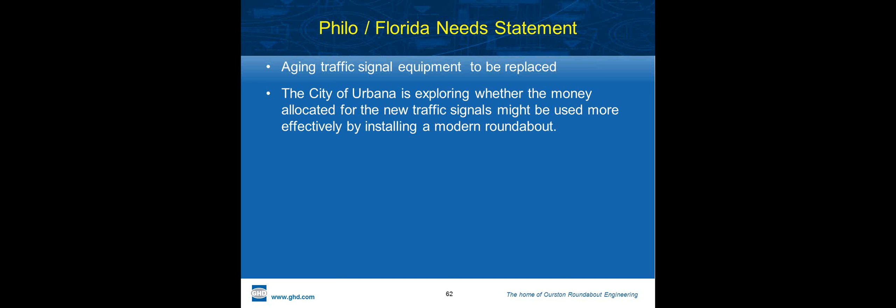So the need statement for this project: it was an aging traffic signal that needed to be replaced. It wasn't high on anyone's crash history database, wasn't in the top 10 locations that needed countermeasures—it just was the typical signal rebuild required. The city said, well, let's explore whether the money we put towards the signal could be used and leveraged to install a roundabout, and whether that would be a more cost-effective solution. That's a virtuous, ambitious cause.

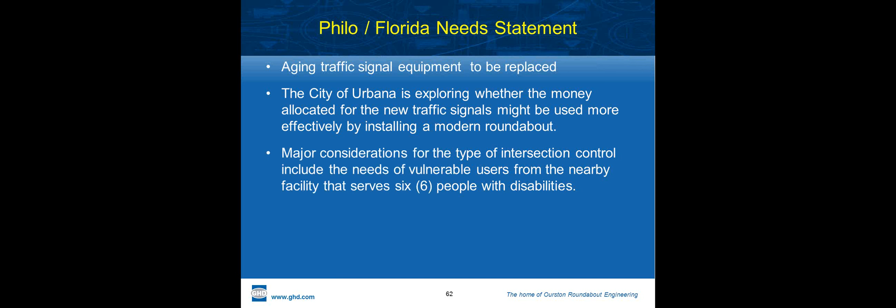The major considerations of the type of control include vulnerable road users. This intersection was right next to an apartment that served people with disabilities, some blind and some in wheelchairs. What was at the intersection was countdown and audible pedestrian accommodations, so it was fairly modern in the sense of the pedestrian heads, location, and feedback devices. It was modern in that sense, but the signal head placements were poor, and the condition of the equipment was poor, so it was time to do an upgrade.

Some of those initial concerns of installing a roundabout included the ability of the roundabout geometry to manage truck traffic. This was on a thoroughfare and needed to accommodate truck traffic, so there might be some major property acquisition to get an adequately sized circle. Fortunately, that wasn't the case, and a moderately sized truck can still fit through.

Here's our intersection: turn lanes in all directions, bike lane integration, northbound and southbound turn lanes in all directions, with bike lanes continuing through the intersection. Some commercial developments in the area, and this is the apartment building in the corner. The transit stops are where pedestrians would cross the roadway and pick up the transit bus on this side and head to the east or go towards the campus westbound. The intersection was frequented by vulnerable road users.

The roundabout option uses a rather shoehorned design, a radial design in terms of the center line being essentially up the middle of the roundabout—slow speed exits, fairly slow entries. It does accommodate a WB-62 making left turns and right turns. So it's not the full highway WB-67 accommodation, but for through movements, certainly the highway vehicle can get through.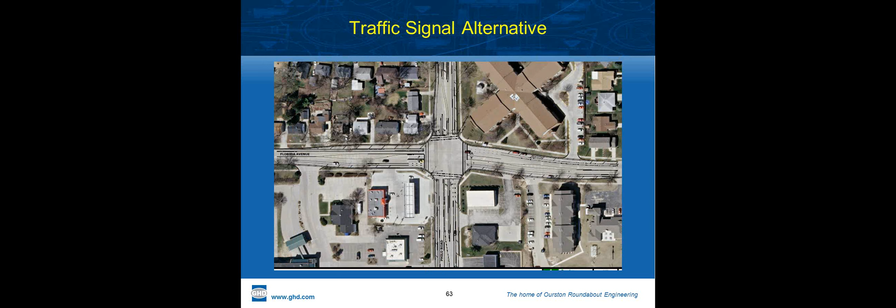So those are our focus for the design. Now designs like this, so maybe stepping back, at a conceptual design level, you sometimes wonder how much effort's involved if you're going to do comparisons of alternatives in the ICE process, as we call it, intersection control evaluation. You have to apply a certain amount of detail into these designs.

So when it comes to something like this where you're dealing with a retrofit and you've got some potentially severe impacts on everything from driveways to property, you've got to develop the layout in quite a bit of detail. This, I would argue, is probably a 30% level design. What would remain to take this to contract plans would be profiles and grading. But essentially the horizontal layout is in a final state, we're comfortable with its functionality. It meets all of the performance requirements for a modern roundabout, everything from sight distance to the vehicles and users.

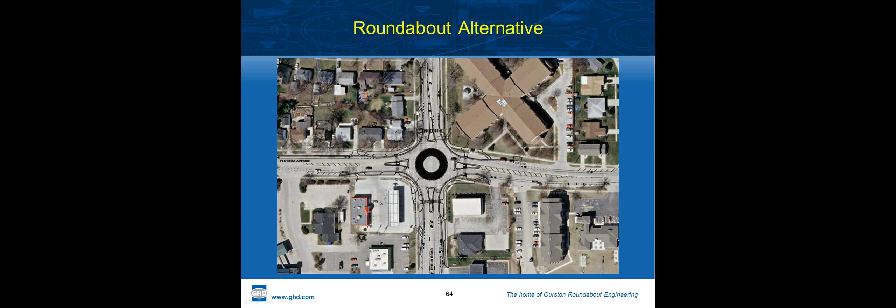And so this is about the level of detail that you need to develop concepts to if you're going to do a thorough job of comparing alternatives.

So the existing and future operations, about 15,000 vehicles per day through the intersection, not a heavy volume for a signalized intersection. And the signal today operates at about a level of service B.

Let's look out about 15 years. Operations, we're going to see about a 3,000 vehicle increase. Still going to be level service A and B, whether it's a roundabout or a signal. And the roundabout is just a little bit more efficient during peak periods.

So a comparison of delay shows that the roundabout would be an efficient and cost-effective, or at least an effective solution in terms of capacity. Reduced delay, reduced emissions. Now the crash information is interesting.

So we're going to apply a life cycle cost analysis to the crash data. And the problem is that if it isn't a safety problem today, it's applying a lot of rigor to what is otherwise really a non-starter.

With only about less than one injury crash per year at present with the signal, and the future of the signal, even if we cut that down by 50%, it's not noticeable to the public. The safety benefits are not so noticeable.

But I can tell you what would be noticeable to the public, and I refer back to those vulnerable road users. They like their signal, they're comfortable with the use of the pedestrian audible, and the prospect of a roundabout was not well received. And that's in spite of the fact that U.S. Access Board deems a single-lane roundabout to be an accessible intersection.

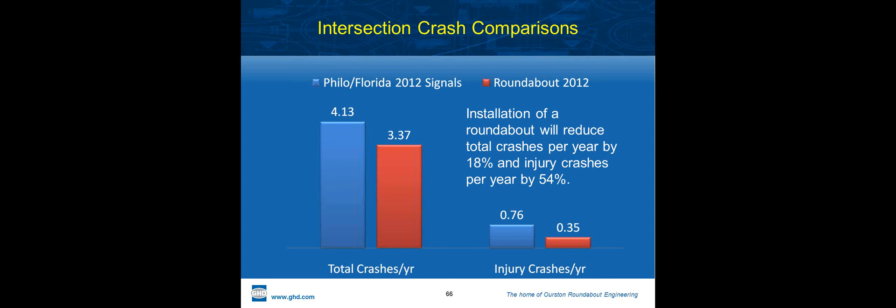We think that the signal is safer because we have this right-of-way guaranteed, seemingly guaranteed, by pushing the button, but it's not. And we prove that to ourselves by walking this intersection. And so I was able to make statements like that. The roundabout lost in the end, but for this reason and for other reasons, it didn't surface as the preferred solution.

So we did the comparison of alternatives, roundabout versus signals, rebuild of the signal versus a roundabout in its place. The annual injury costs were surprisingly about half, a 54% reduction, quite a bit lower for the roundabout. The peak hour level of service was slightly better for the roundabout. The capital costs were significantly higher for the roundabout, almost $500,000 in favor of the signal. But when you factor the capital and life cycle costs, the roundabout came out ahead.

So why does the municipality decide against the roundabout? Well, it came back down to the vulnerable road users in the context of that installation. For a city that doesn't have a lot of roundabouts, Urbana said we want our first few roundabouts to be shining examples. We don't want to put ourselves in a very difficult position for introducing roundabouts in this context. And I concede that—if I were in their position, I understand what's motivating them.

So in the comparison results, the single-lane modern roundabout fits the right-of-way. It has narrowed lanes, nice short pedestrian crossings, and it lowers speeds. So for lots of good reasons, the roundabout was a great solution—superior safety performance, better efficiency, but higher costs. And this is out of their pocket; the injury crash costs are not recovered by the agency.

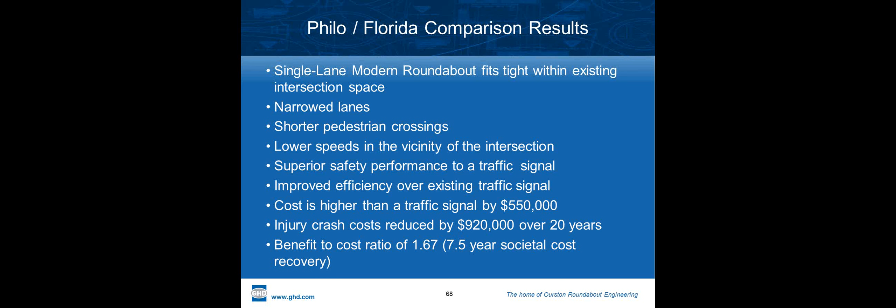So the benefit cost ratio was quite good, better than 1, which at a minimum should be 1.5, almost getting to 2, with a payback or recovery for society—not so much the agency, but society benefits by having a crash reduction recovery of the cost of improvements over about 7 years.

Okay, the second and last of the two examples, same municipality, but suburban now. The campus of the university is over here, so we've got some higher speed, moderate speed arterials. In the area of the intersection we have a park in the southeast quadrant, a church in the northeast quadrant, some experimental farms in the other quadrants, and university property that's either vacant or has some passive use.

So we're in a moderate speed change area coming into a residential and institutional zone with a retirement home in the southeast quadrant—we see the need for a bit of a speed brake. The intersection is currently stop controlled, and that speed brake exists in the stop control but wouldn't be evident from a signal. There are driveways to development and residences that would be impacted by a green indication where traffic can speed through, and you don't have a two-way left turn lane downstream of the intersection. So there's an interesting context, not unlike conditions I'm sure you've encountered elsewhere.

The needs of the intersection, signals were warranted. Not a lot of collision experience—in fact neither of these two intersections were in the top 25 locations identified by the city. And that should have been one of the first clues: if you're advising an agency on sites suitable for installation of roundabouts, try and aim for the worst problems.

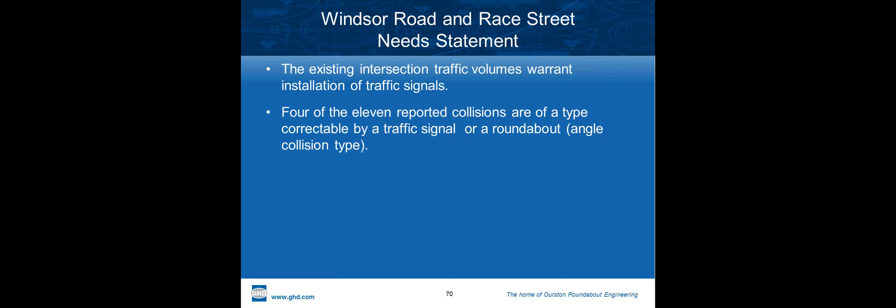So sites like this that weren't high on the crash history radar had signal warrants, but that's not unusual. They don't look like a good candidate for roundabouts, and as the study bore itself out, the roundabout was not the chosen solution. But let's look at the results.

So I talked about the context: nearby seniors' residence, regional park, bike paths, church, pedestrian traffic at the intersection. The all-way stop works for them, they're pretty happy with that. Low pedestrian exposure and crashes, it's a speed brake, so they're quite happy with that.

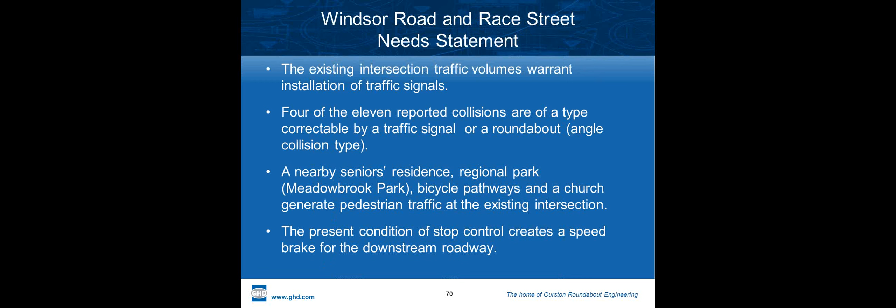And at the public meetings, we wanted to make it evident that if they got the signal, which is what a lot of them wanted, they were going to have a green light in the conditions downstream with high speeds crossing the intersection that they didn't have before. And that would put pedestrians at risk and make access of driveways more difficult.

So again, in the comparison of options at the detailed level, we've already pre-screened. There are no other options besides the signal and the roundabout. So we're working down into that level 2 analysis of detailed comparison, and that requires a footprint sketch, a concept diagram if you will, for the intersection improvements associated with signals.

So not a lot of change, pretty much within the existing pavement. Turn lanes already there today, two lanes in each direction already there today, even the three-lane cross-section on the side street. So this retrofit's pretty cheap. There's no property required. The signal can be installed quite cost effectively.

The roundabout, on the other hand, is a big bite in terms of right-of-way, even though it's maybe passive land use. Someone has to buy that, and the university has to give it up. The alignment's shifting to avoid property takes and impacts to everything from little garden areas. And even though the speeds are low, the impact is bringing the intersection closer. The church, the signage for the university, just a number of impacts.

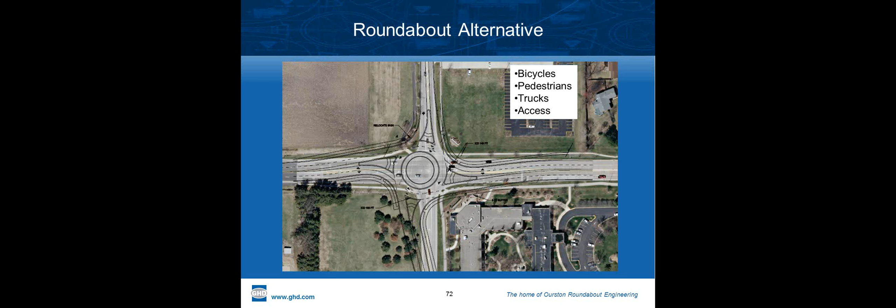You can see the larger footprint to create a functional two-lane roundabout. Again, those sensitive users, large trucks, and access being important considerations of the context.

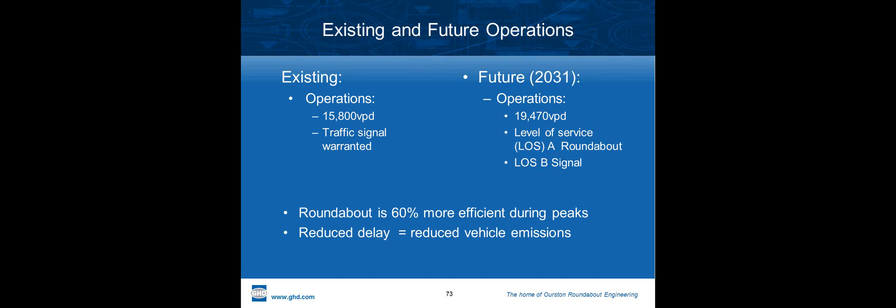Again, not a high volume intersection with signals warranted, a slightly higher increase in traffic. Roundabout: level of service A. Level of service B with the signal. Good efficiency improvements if roundabouts were installed instead of signals. Good delay. Here, the crash reduction is a little bit better for the roundabout.

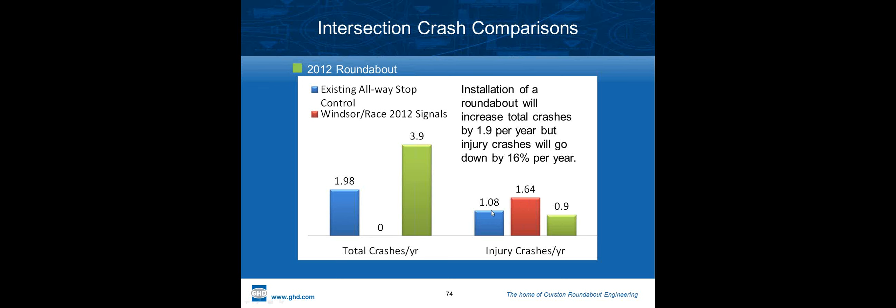The 1.64 is the signal. This is the signal today. And so a slight increase in volume at the signal means that there's going to be a slight increase in crashes. So not a decrease, but we're actually going to install signals from the stop control and have a worse crash condition in the after.

Hard to justify the signal as a safety improvement.

So this is the slippery slope of doing life cycle cost analyses: if you're going to factor in injury crash reduction, it's going to offset your construction cost, but you need to have the will to carry solutions like this forward when the construction costs are significantly higher.

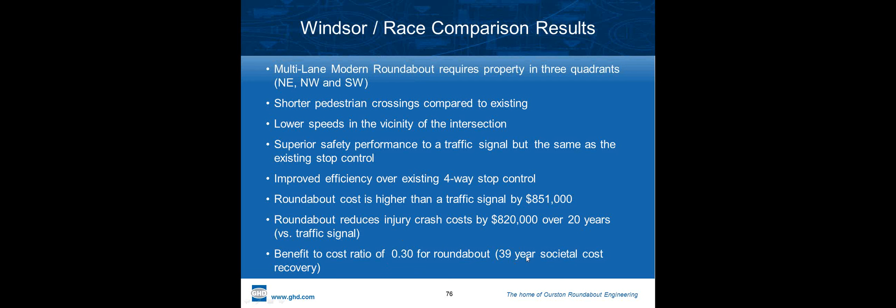So the big property footprint, the property impacts, the short pedestrian crossings, superior safety performance, but the higher cost essentially disqualified the roundabout. Cost benefit of the roundabout: 0.3. Long recovery period. So it's tough to cost-justify the roundabout, all things considered.

So they went ahead and programmed the traffic signal improvements.

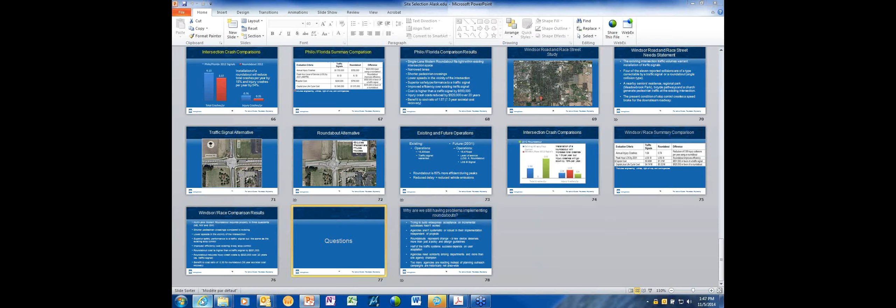Or any comments about experiences. I'm interested to hear what types of studies people are using to compare intersections, and whether anyone has been doing the two-step screening, second-step detailed study.

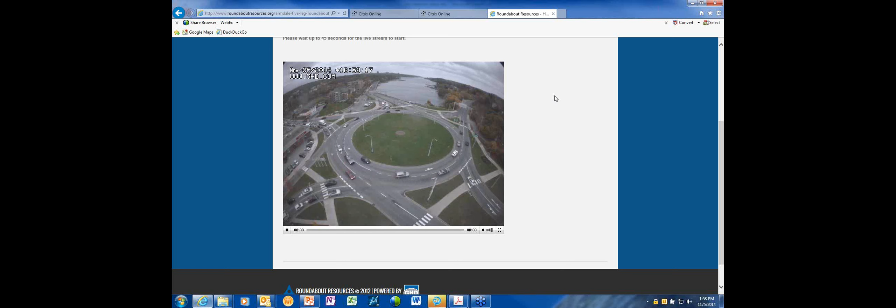I'll send you a paper. It was done in 2005 for a Caltrans project. We did some speed study sampling of roundabouts. Hillary Isebrands, who's now at Federal Highways, did some good crash reduction and speed studies with rural roundabouts, and her paper was published in Seattle in the spring, and I think she's put it in a couple of circulars. So there's some good basis for some of the benefits of roundabouts in rural high-speed settings.